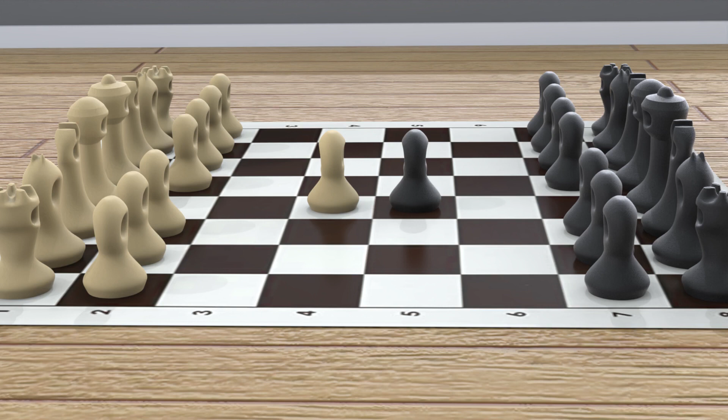My chess pieces were modelled entirely within the 3D Sculptor app Xshape. Xshape uses subdivision modelling: you start with a 3D shape primitive and use push and pull techniques with a robot to model. For this tutorial I'll show you how I modelled the pawn, rook and knight chess pieces.

Before I start, Xshape is a very freeform application, so our models won't match up exactly. You can follow my steps as closely as you can, but you're also free to create your own designs, or take any tips away and create your own set based on the features I show you. I'll be focusing on the use of the crease tool, subdivision extrude, and inserting loops.

To begin, I'm starting a new component within the Xshape app. I'm going to name my file Pawn Chess Piece.

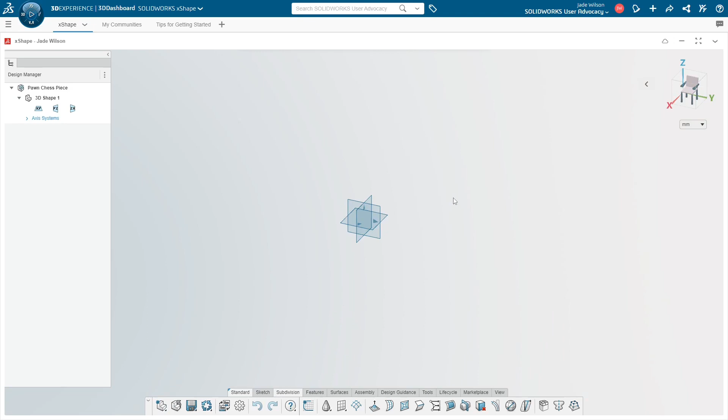Once the design window opens, I can create some sketches as size guides for my chess piece. These will just be guides to design to, so that I don't have out of scale pieces and the set comes together more cohesively. So selecting the XY plane, select the sketch icon and use the circle from the sketch tools here to draw a 27mm circle from the centre axis and then close the sketch.

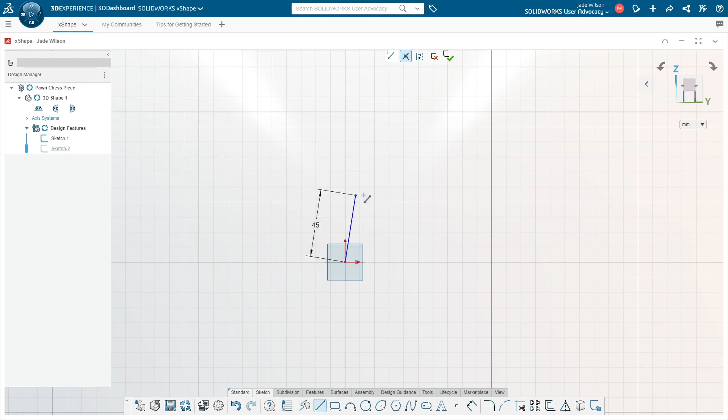Then sketch onto the YZ plane and use the line from the axis to sketch a 45mm vertical line. You will see a V icon to know that the line is vertical. Closing the sketch, these guides will outline the width and height of the chess piece.

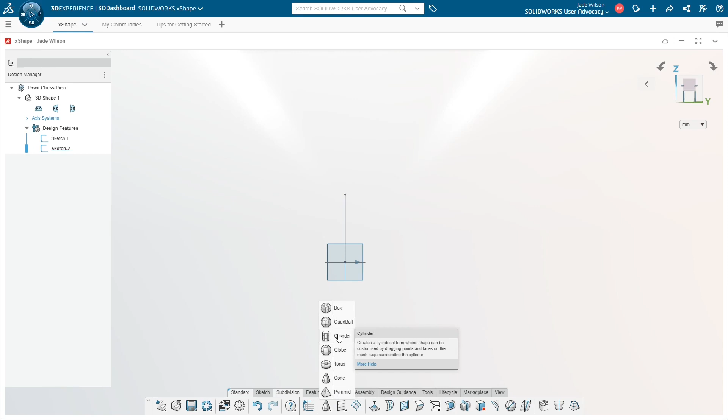The next step is to choose a primitive to start modelling. You'll find these shapes under the Subdivision tab. Use the drop down to see the shape options here. I'm using the cylinder for all my pieces, and I'm dropping it onto the axis here. It should highlight bright blue like this.

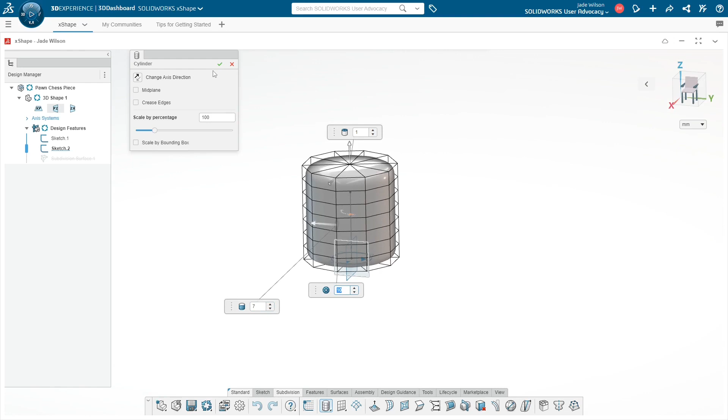Once dropped in, I can edit the number of loops or control loops of the shape. So I'm editing the horizontal loops to 7 and the vertical loops to 10, then check the tick. Sometimes I leave the shape as it is and add loops when needed, but I already know the approximate number of loops needed to design my chess pieces.

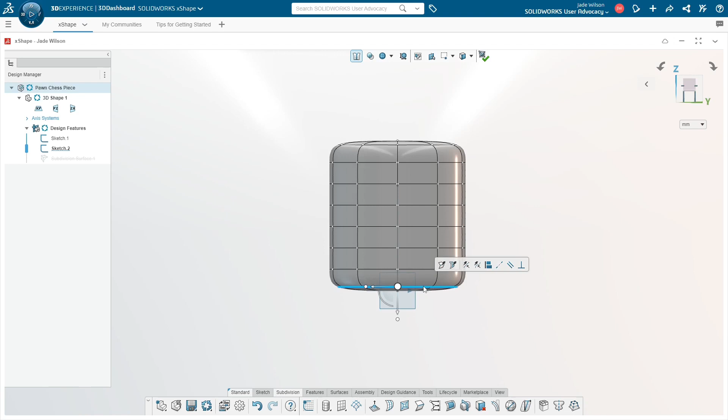Viewing from the front, I'm going to start by selecting this edge. Holding Shift, I'm selecting the further edge of the next edge here to select the whole loop around the shape. I can then use the Quick Features toolbar here to crease the edge to become straight along the base of the shape. Then I'm just dragging over and selecting the points of the two bottom rows and pulling them down using the arrow heads of the robot.

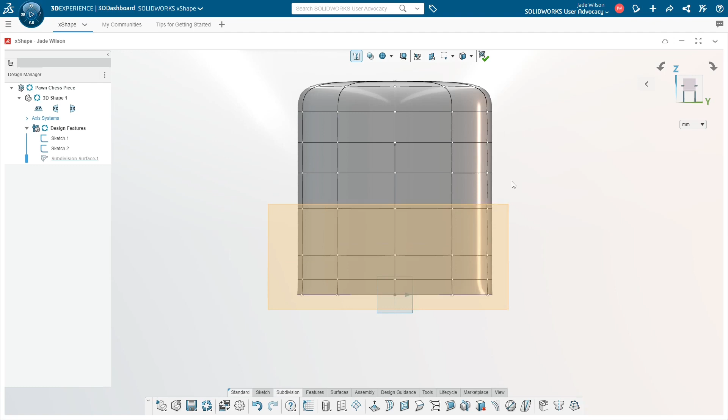Before I move on to the design of the pawn, I'm going to scale down the shape to fit the sketch guides. Selecting the whole shape, I'm using the X and Y dots of the robot, holding Shift to select both, drag to pull the cylinder up to the edge of the circle sketch. This doesn't have to be perfect. Then I'm going to drag some of the rows of the shape down to try and get the height of the pawn up to the top point of my guide sketch.

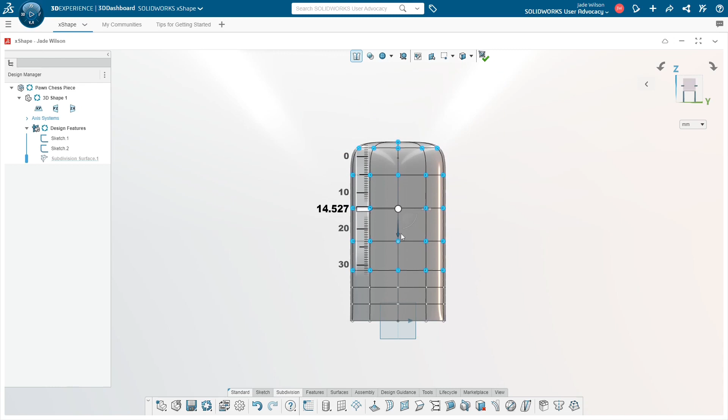I can now focus on the design. Starting at the base, I'm scaling the bottom rows out to create almost a rounded taper like this. Remember to select both dots on the row to scale proportionally.

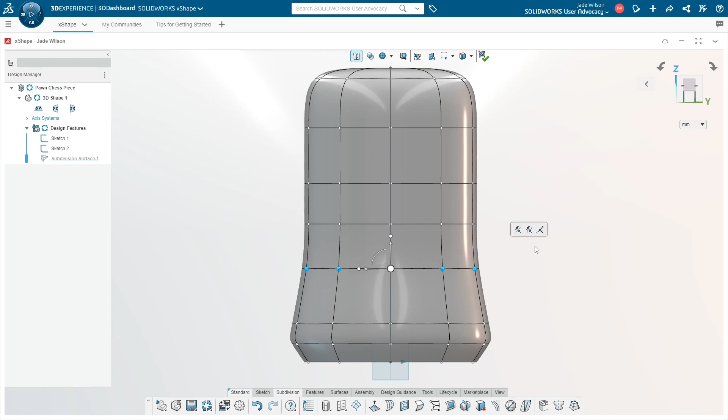You may see me selecting points for scaling and then view from the front. This is just to see the profiles more clearly. I'm creating a rounder profile for the top of the pawn piece.

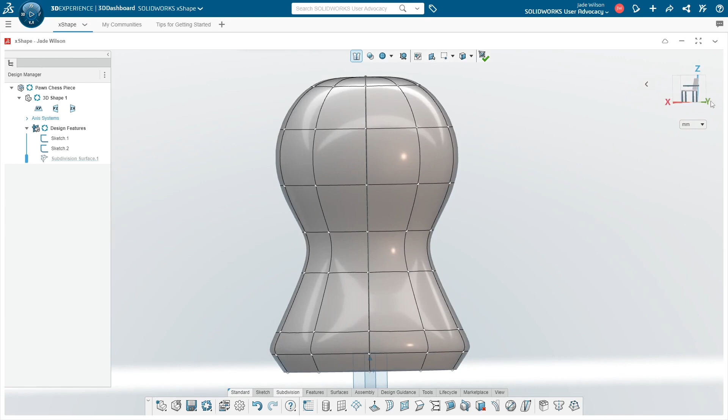With the rough shape in place, I can view from the side profile and use this centre face and the subdivision extrude feature. You'll see in the preview this extrudes outwards, but to create a hole through the shape, you need to select a face on the opposite side like this. The preview will change to a hole. Apply it with the tick.

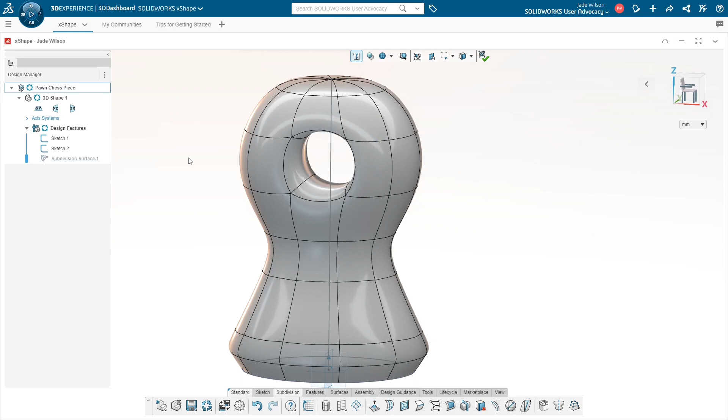Going back to my front view, I'm going to thin out the top part of the shape, selecting the top half of the piece like this, and scaling the shape one way. Now it's just a case of me fine-tuning the shape until I'm happy.

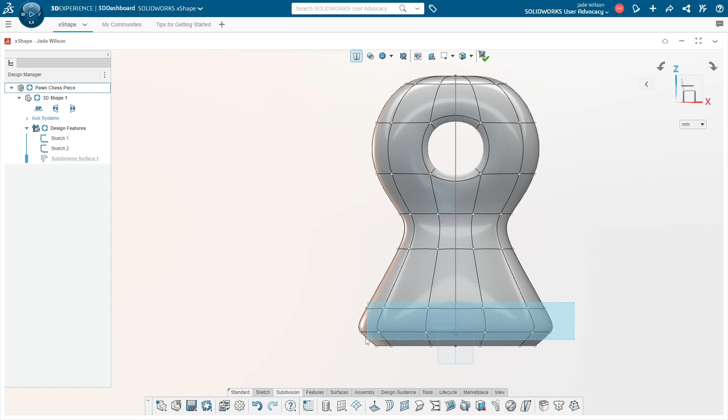If I click on the save icon here, the shape will close and knit itself into a solid body. I like to export my models using the export option under Save.

This lets me bring the part into SolidWorks and create animations and renders that you'll see in this tutorial. If you want to do this too, and you're using a desktop version of SolidWorks, just change the destination to File on Disk and change the file type to Step AP214, and save the file where you want it.

Now I can move on to the Rook chess piece. Instead of starting a new part from scratch, I'm going to use Save As and change the name to Rook chess piece.

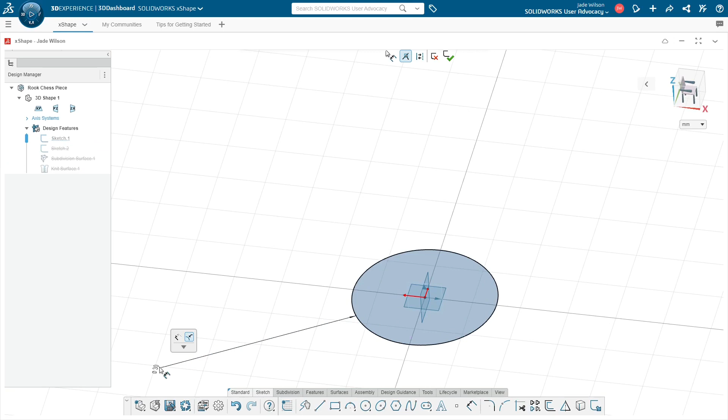Now I can go back into the initial guide sketches to amend them for this chess piece. For the circle sketch, this needs to be edited to 30mm, just a little wider than the pawn piece. Then edit the height of the line sketch to 50mm, which is 5mm taller than the pawn.

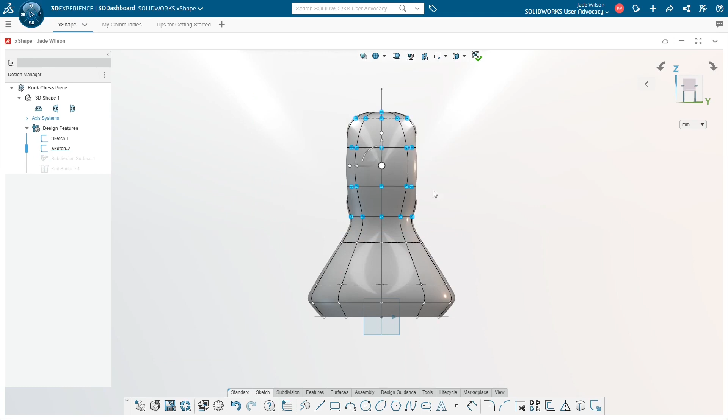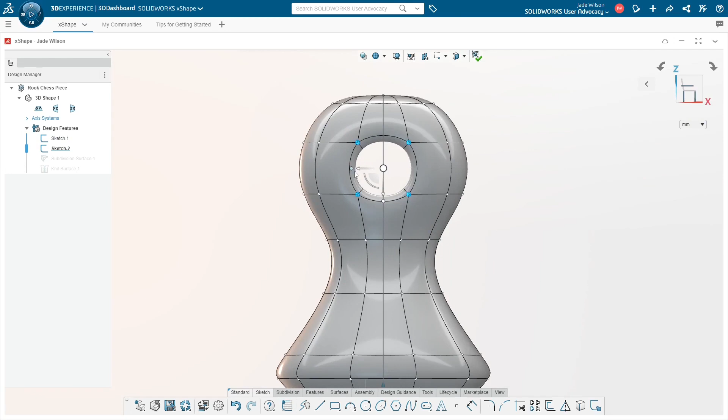Now I need to add some more loops to the shape to give myself more controls. Under the Subdivision tab, select the Insert Loops icon here and select this edge. A preview of the loop will appear. I only need one, so I can check the tick to apply the loop.

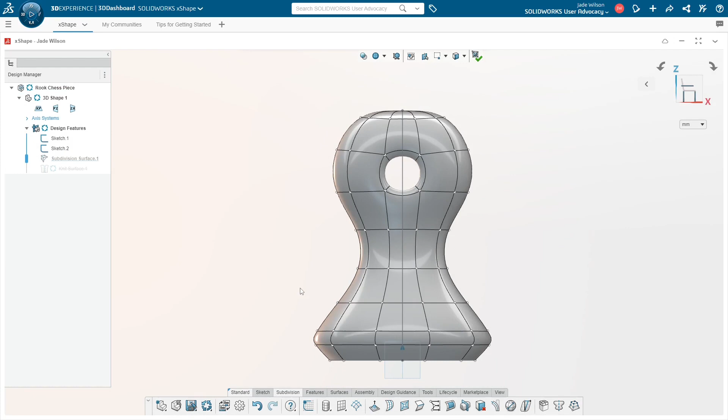I need to bring these rows up higher to create the upper part of the rook, and then scale down the overall width of the piece across these 2 rows. Here I'm tweaking the shape to tighten the corner of the piece. I'm also dragging this row down to make space to add a second loop here.

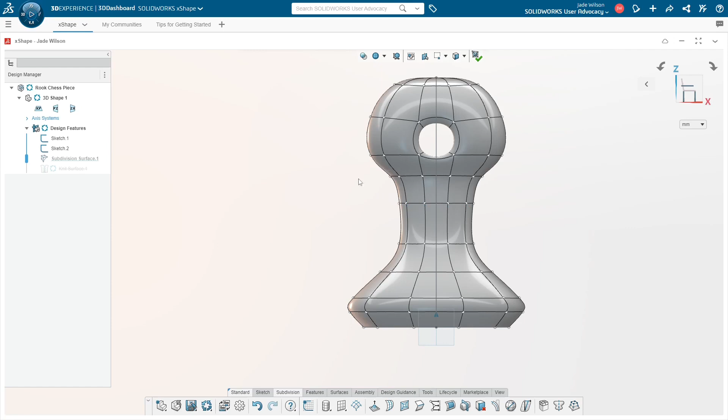Editing these few rows around the top of the rook, I need to make space for another new loop here. Using this loop, I'm scaling it up to create straighter sides for the rook.

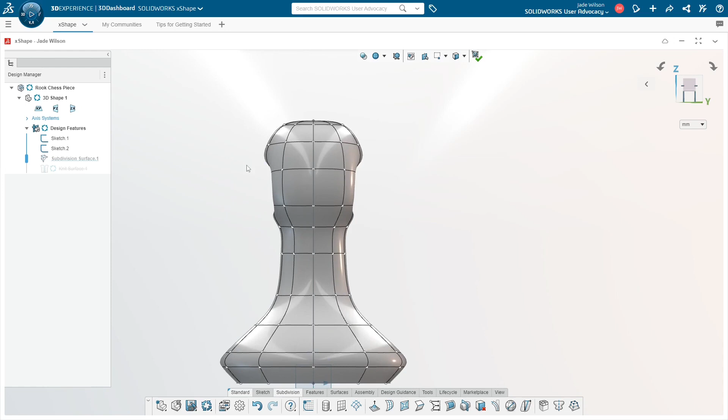Looking at the shape from the front plane, I'm scaling up the top half of the rook to give it a rounder top half like a castle tower. I need to scale these 2 rows separately to be a similar width to the top of the rook. Then I need to move the hole up to be more centre.

Before I move on, I'm going to show you a feature where you can realign points. Selecting the loop here, you can use Line Align. I'm repeating the process for these points across this row, and then the top row here.

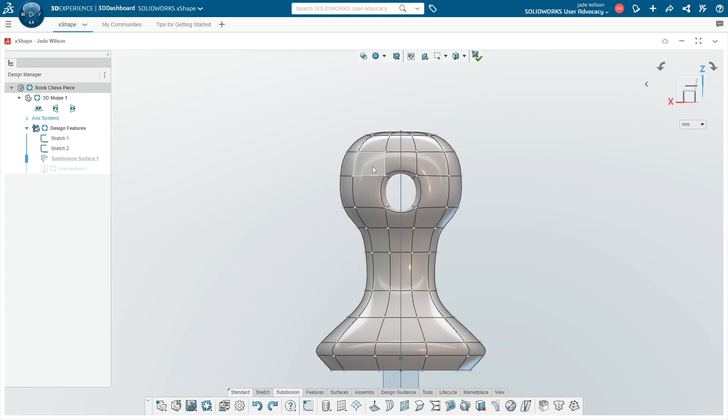Next, I'm scaling down the top points of the rook this way, and then scaling the hole back to be circular, then scaling it down smaller again.

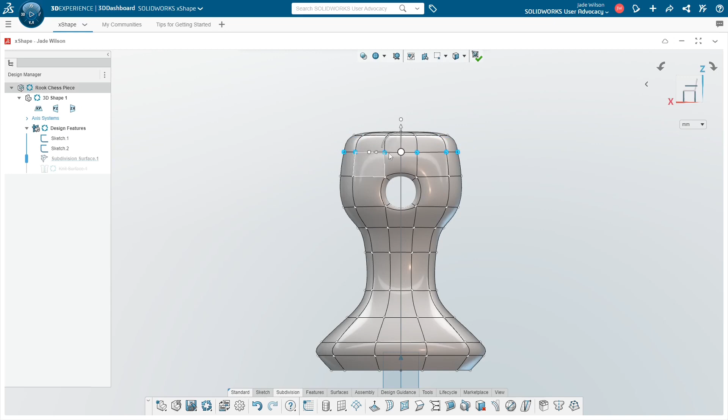I need to square off the top row of the rook with this loop, and then the same for this loop to keep the profile smooth. Viewing from the top, I need to make the top 5 rows circular again by scaling the points this way.

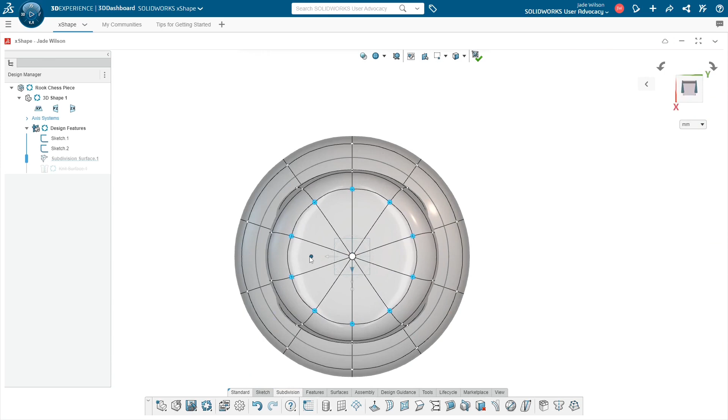Sometimes you need to isolate certain rows individually. To make the design look more like a rook, I'm going to add some extrusions to the top of the shape. Move the piece to view from the top like this, and select this face of the shape and the extrude icon.

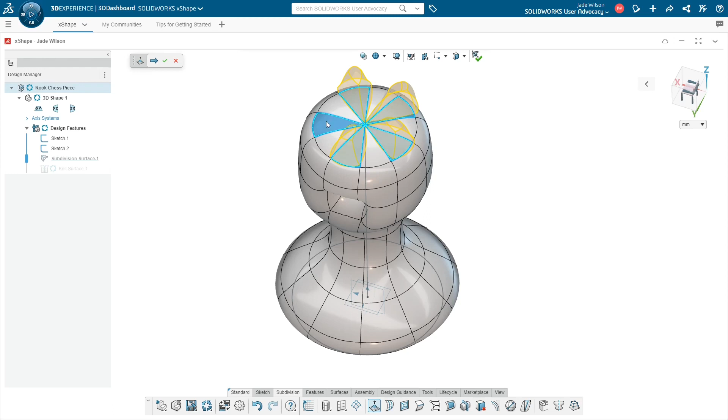Then select every other face segment until you have 4 extrusions and check the tick. The shape is now taller than our guides, so I need to shorten the extrusions a little and scale them inwards while I have them selected.

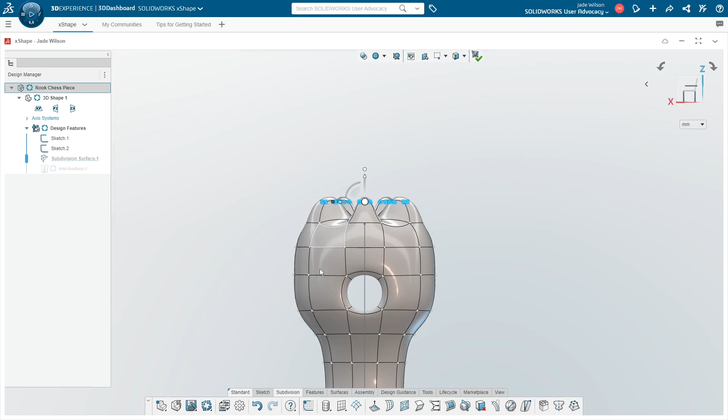Then I can drag some rows down to shorten the rook until it's at the right height. Now I'm just tweaking the shape of the piece.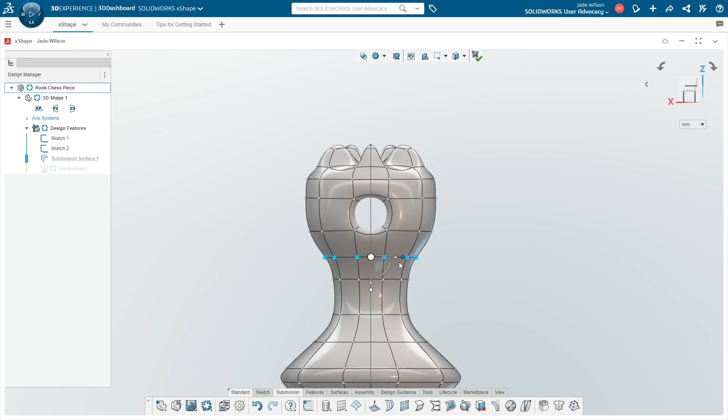Narrowing the middle part, and again scaling down the top of the rook further, and tightening the height of this top part.

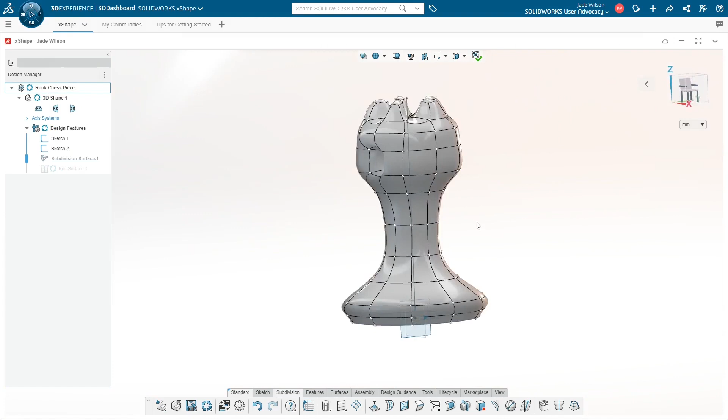Once I'm happy with the shape of the rook, I'm going to sharpen the top edges of the extruded faces a little. Selecting one of the faces and the crease feature here, I can edit how soft or sharp the edge is. So I'm going to select the 4 other faces and edit the crease to 60 so that they aren't as rounded as before.

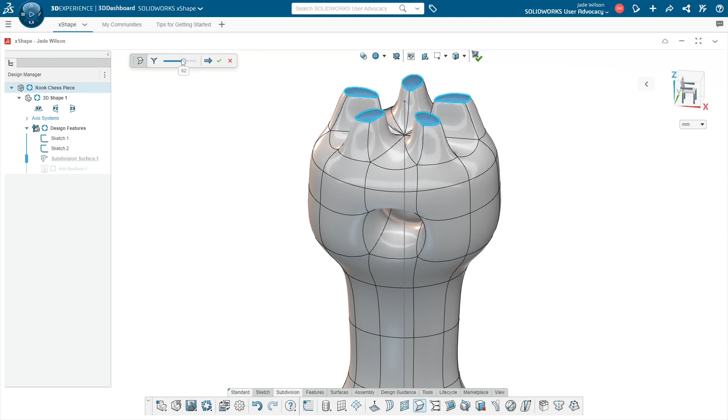I need to shorten them a little to be in line with the guide height, and with that done, I'm happy with the finished piece. I can save the part and also export this part too.

Finally, I'm going to move on to the knight piece. To do this, I'm closing the rook chess piece and opening the pawn piece.

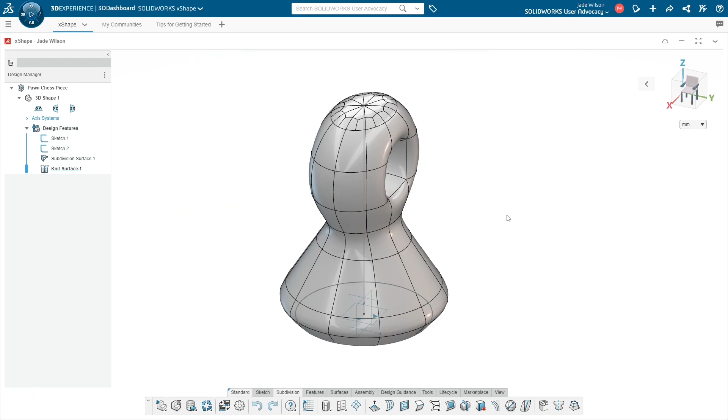Once open, I'm going to re-edit the guide sketches for the knight. The circle sketch needs to be 35mm, and the line sketch height needs to be 55mm.

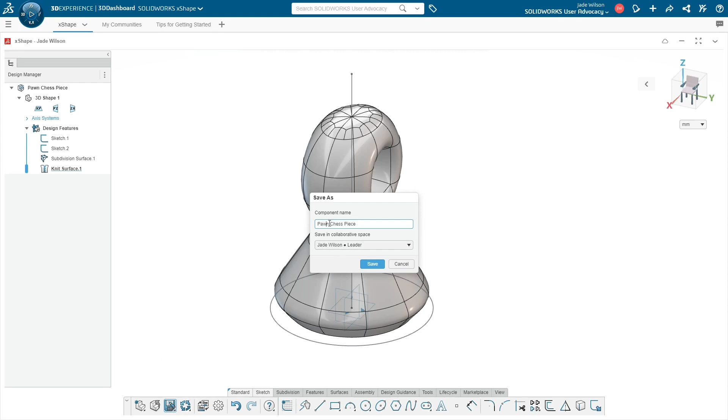Then I'm reusing the Save As option and renaming the part Knight Chess Piece. Sometimes it's faster to use shapes and guides you already have in place. This can speed up modelling similar part models, especially when you can just add or edit existing geometry.

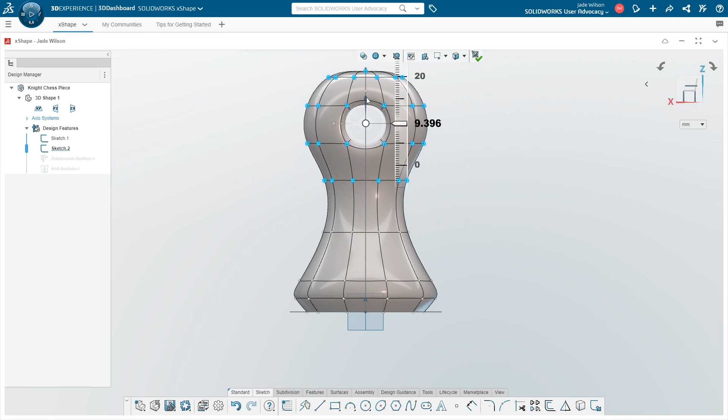Editing the sub-D surface, I can now stretch the shape up to my height sketch, then widen and scale up the base of the knight piece up to my circle guide.

Next, I'm squishing the base loops down as I need more space above to create the horse-like head of the knight piece.

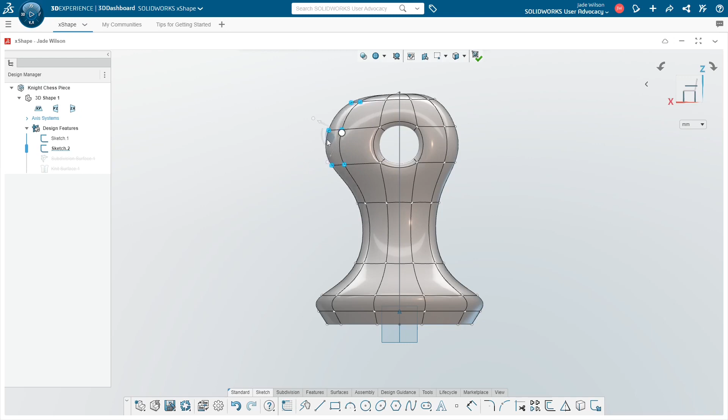I can grab these points on this side of the piece, and instead of using the arrows of the gizmo, you can instead drag the gizmo from the blue segment and move it in any direction. I can also use the rotate bar of the gizmo to change the angle of the points like this.

I'm dragging these points up to straighten the points and tighten up the angle of the neck. And then scaling down this hole and moving it.

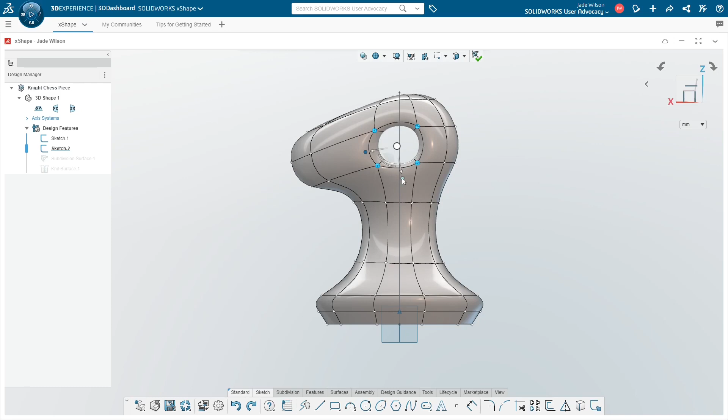But first, I can see that the gizmo isn't along the XYZ axis, but you can change this. With XYZ selected, I can drag it into place.

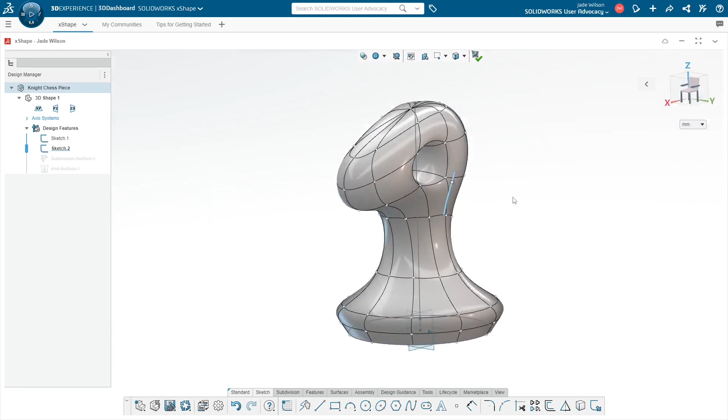I can then play around further with the profile of the knight piece. Once I'm happy, I can add some ears to the piece.

Selecting this face of the top of the knight, I can use a quick extrude option here and repeat to the other side.

With the ears in place, I can play around further with the shape of the knight based on the proportion of the ears.

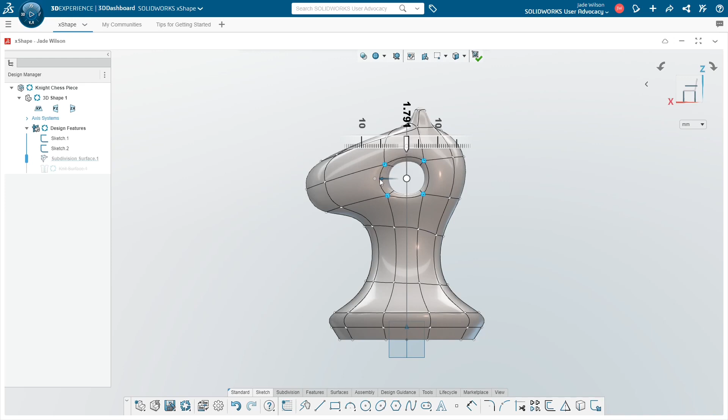You can see the piece is too tall with the added extrusion, so I'm dragging down these loops to be level with my guide. Selecting the top face of an extrusion, I'm going to use the crease feature on both faces and decrease it to 50.

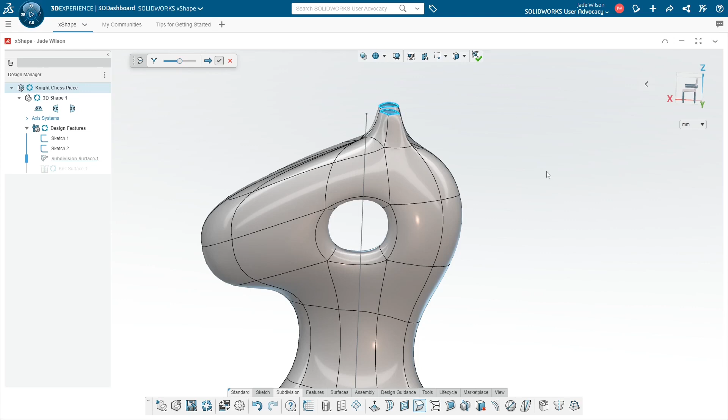I'm inserting an extra loop onto the top of the piece to give myself further control of the head shape of the knight.

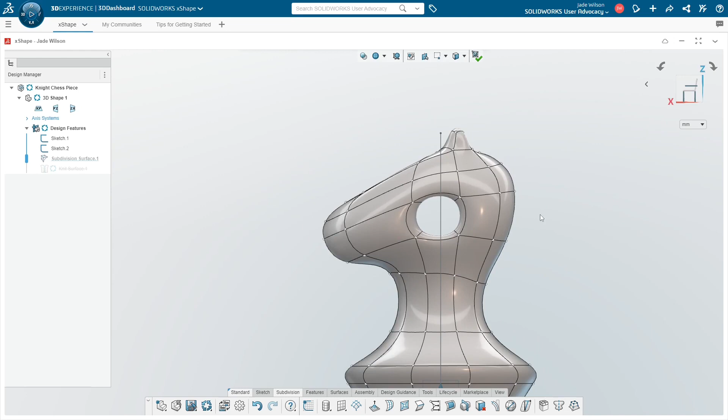Then from the top view, I'm going to select these points and scale down the width of the head. This creates more of a nose.

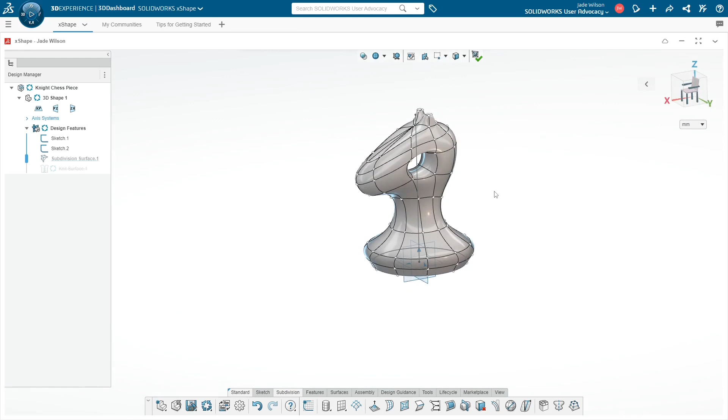And with that, I'm finished with this piece. I can now save it and again export it out. Visuals of the other pieces are available in the blog if you want to create the rest of the set.

The exported models that I brought into SolidWorks were used to create an animation for rendering in SolidWorks Visualize, which you can watch here.